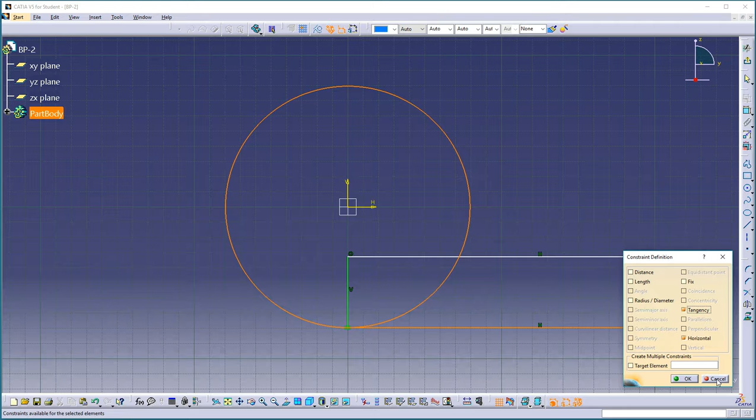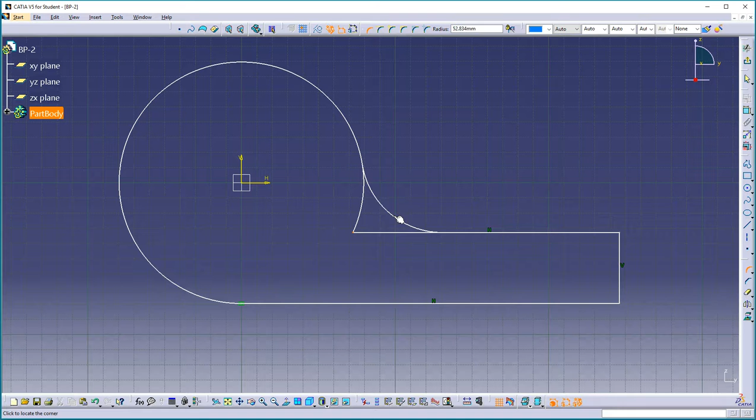We'll say OK there. Now that I have the basic geometry set, I'm going to use my trim option. I'm going to double click my quick trim, and I'm going to come in here and click here, here, and erase this piece. Now the last thing I have to do is put a little corner in here, and we'll put a little corner right there. Okay, that pretty much sets this design.

Let's pop out of Sketcher and let's make a pad. I like to do the mirrored extent, and we'll just drag this a little bit away. There we go, that's a little bit more. That's the basic shape of the part.

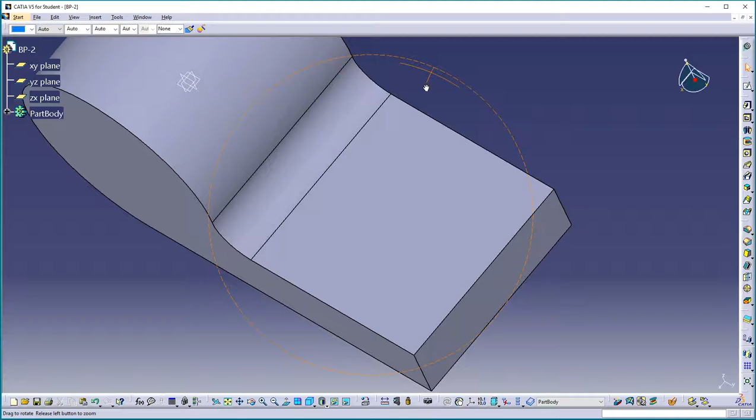Now the next thing I would do would be to sketch on this surface here, and then do your elongated hole. Also, because we've chosen the axis system and the mirrored extent, that makes it very easy to put this right on the axis. Okay, and of course dimensions would all have to be set here, and you'd have to make sure that you constrain the entire profile.

One of the things to be cautious of here is to make sure that even if you set this dimension here, say from here to here, this half of the elongated hole turns green, but this one is still free to float. I prefer that these all be set, all profiles be green.

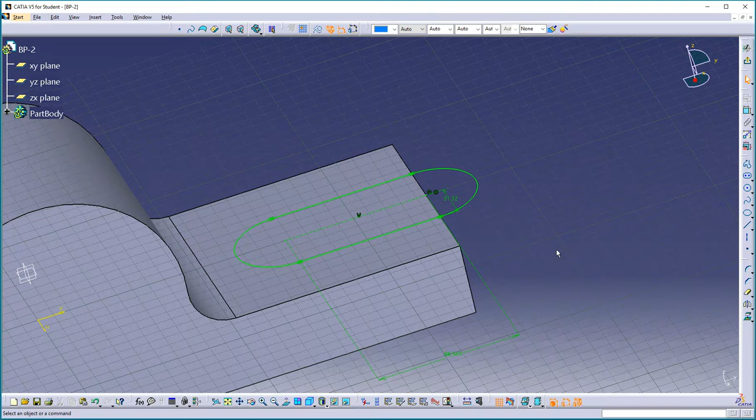Let's put a dimension between there and there, and let's make this coincident there. Now that's a better way to do that. We'll pop out, we'll make a pocket all the way up to last, and say OK.

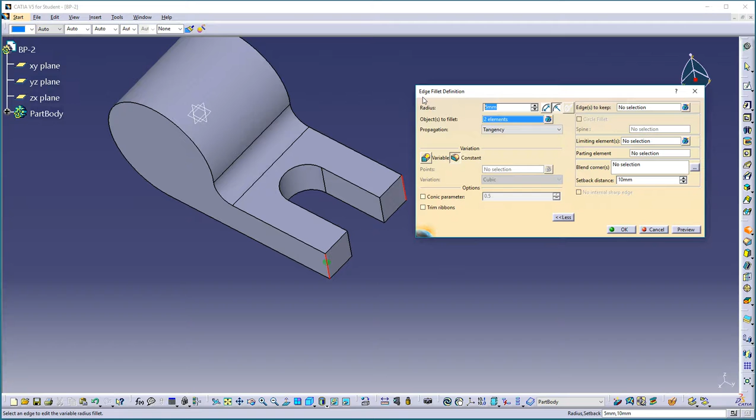Now we have to put a few fillets on here and here. So we'll pick the fillet option, we'll pick that edge, and we'll pick that edge, and let's give them a radius in here that's at least somewhat right.

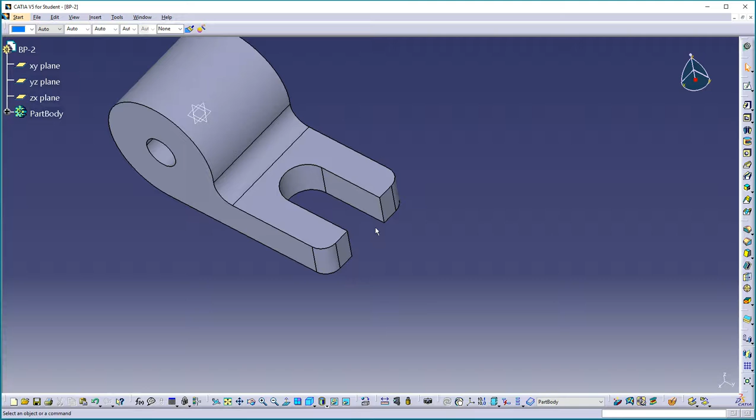Then we'll pre-select this edge, and we'll go to our hole option. We'll pick any part of this surface, and it's going to snap that hole right to the center. Let's bump up the diameter of that hole quite a bit. There we go. Let's make it an up to last and say OK, and this part is completed.